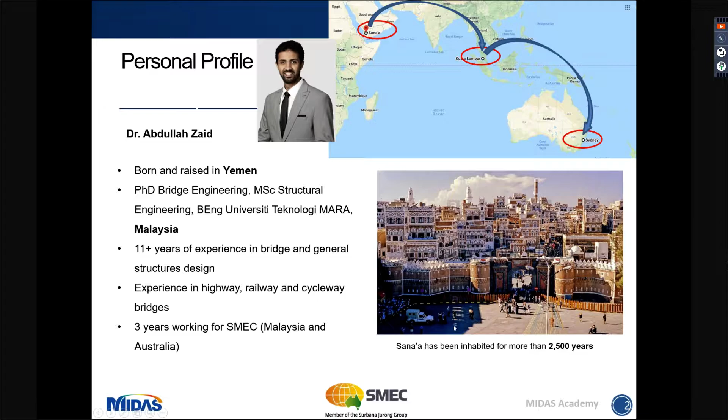I started with SMEC Malaysia for a couple of months, then I moved to Sydney. This is just a picture about my country, Yemen, and this is the capital city, Sana'a.

SMEC stands for Snowy Mountain Engineering Corporation. It's attributed mainly to the Snowy Mountain Hydroelectric Scheme project, which is one of the engineering wonders.

And this project has won various awards.

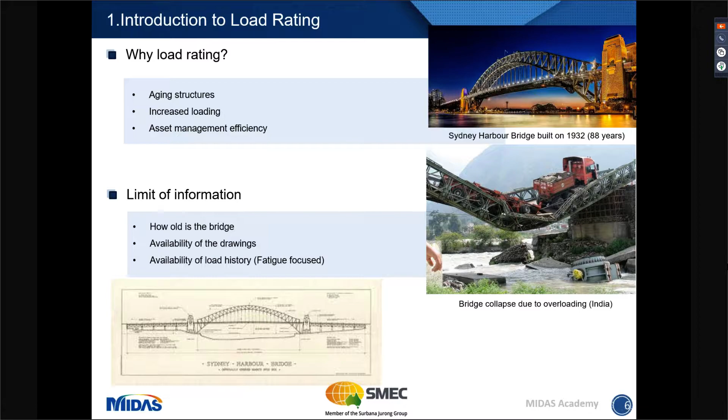Also, from the fatigue perspective, we need the loading history for the bridge, and we will get into details later.

Bridge assessment standards: every country or continent has different codes, but in Australia we have the overarching code AS5100, which is used nationwide. It has different parts, and Part 7 is especially for bridge assessment.

We also have state and client requirements. Each state in Australia has its own guidelines on how we undertake bridge assessment. In New South Wales, where Sydney is, we have for example the ASA, the Asset Standards Authority, which gives us guidelines on how we undertake the bridge assessment.

Other states like Victoria and Queensland have different guidelines and manuals.

In general, there are overarching steps for the bridge assessment, which is also given in AS5100, Part 7. But in general, we have levels of assessment, which is basically level 1, 2, and 3.

Level 1 is mainly to check the general serviceability of the structure and identify any emerging problems. Then we have level 2, which is a bit more comprehensive visual inspection, where we do a specific rate to rate the condition of each component of the bridge.

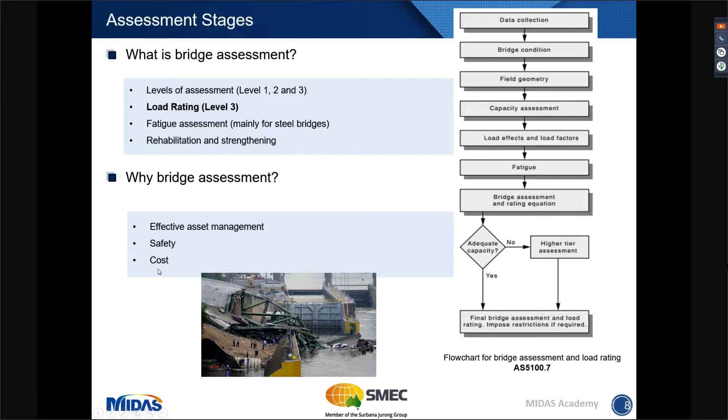Load rating - when we undertake the load rating, we have different steps as well. So we start with the as-new load rating. Basically, the as-new load rating is the design load of the bridge with regards to the as-built drawing. So this is assuming the bridge was just built, and based on the drawing, what is the capacity of this bridge?

Then we have to undertake the structure mapping and condition assessment. This is basically to identify any deficiency on the existing bridge, like section losses or cracks and spalling of concrete. And from the structure mapping perspective, if there are any new members or strengthening of the bridge, or maybe some additional structure to the bridge itself, we have to take that into account in our assessment as well.

Then after the as-new load rating, we have the as-is load rating. This is basically to illustrate how much capacity the bridge has lost during its lifetime. That could be due to corrosion or any other external impacts.

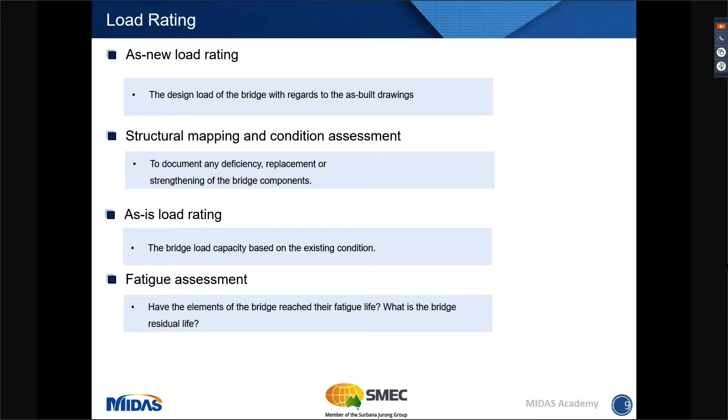The fatigue assessment or fatigue analysis has gained a bit of interest, mainly because there have been few bridge failures, especially steel bridges, and the reason is attributed to fatigue. That's why we have heard about bridges that lived for 50 and 80 years collapsing at the end. There are different reasons for that, and one of them is fatigue loading.

To give you an overview of fatigue: basically when we design a bridge to ultimate limit state, we see how much is the ultimate strength of the section, and we can load that section to its ultimate capacity. Nothing will happen. But if that stress or load has been repeated many times...

...100,000 times or millions of times, then as we see, the fatigue capacity will reduce with the increase of the load cycles. For instance, if we have a stress of sigma A1 in a structure or bridge, for that stress we can only load the bridge for N1 cycles. If N1 is 1,000,000 cycles, we can have that stress run 1,000,000 times. But if we expect the bridge to have more than 1,000,000 cycles, then we have to reduce the stress by increasing the section.

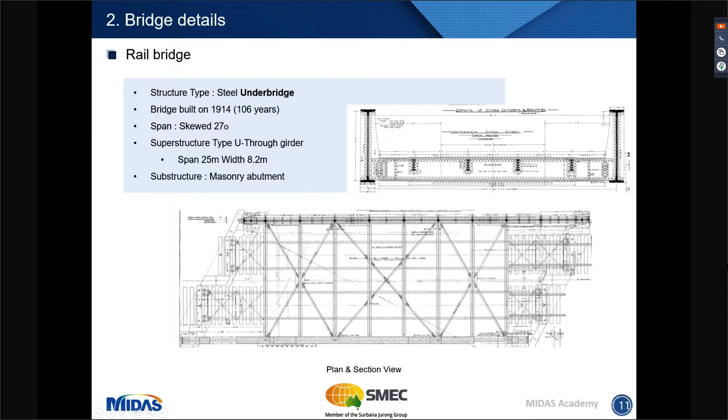The cross girder depth is 0.85 meters, and the stringers are between 355 to 500 millimeters - this is mainly the internal stringers. The end stringers are deeper because they are longer, as we've seen here - those stringers are longer. We have the transoms, as we can see from this picture, which are timber, and we have cross bracings, which are like equal angle structures, and then we have connections. Basically, that's what connects or rivets the cross girder to the main girder and the stringers to the cross girder.

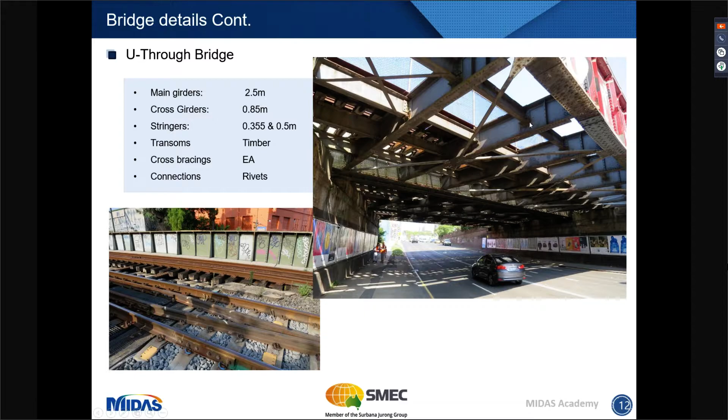So as I have explained, what are the parts that make up the bridge, or what are the components of the bridge itself. But there have been questions of what we need to model and whether we need to model everything. From engineering judgment, the engineer should have the ability to judge and model the things that affect the structure's behavior.

It's not in the interest of modeling everything, because with the advanced software we have, like MIDAS, we can model everything on the bridge - like cross bracing, the connections, the rivets, and everything. So the question is whether we need to go to that depth or not. I've illustrated that with 2 types of modeling: the grillage model and the FEM model.

The grillage is simple line models, but the FEM models are more into plates and 3-dimensional modeling of each component, such as the webs and the flanges with the stiffeners and the connection. This model was done by one of my colleagues in SMEC as well.

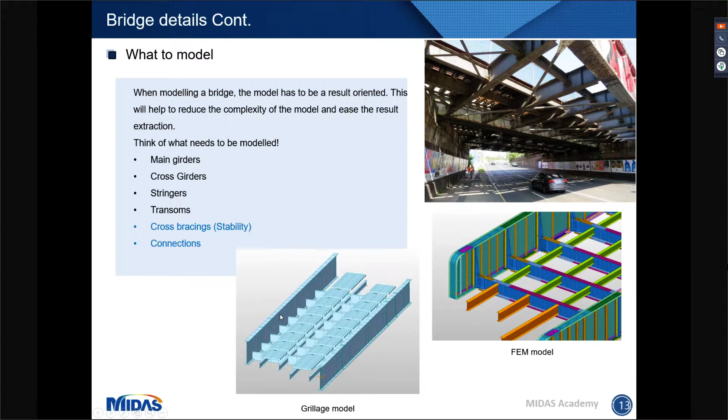Then for the bridge condition, we have undertaken a structural mapping. Basically, the structural mapping scope is to identify any old members being replaced, or any new members that have been used to strengthen the bridge.

And also a change for the section capacity, where we have losses on the top flange, bottom flange, or the web. We have to identify those and estimate how much is the capacity after the section losses.

So it's also important for us, after doing the condition assessment, to think whether the changes happening to the bridge mean we need to really remodel the bridge and use the new sections or the new members or not. This has to happen on a case-to-case basis.

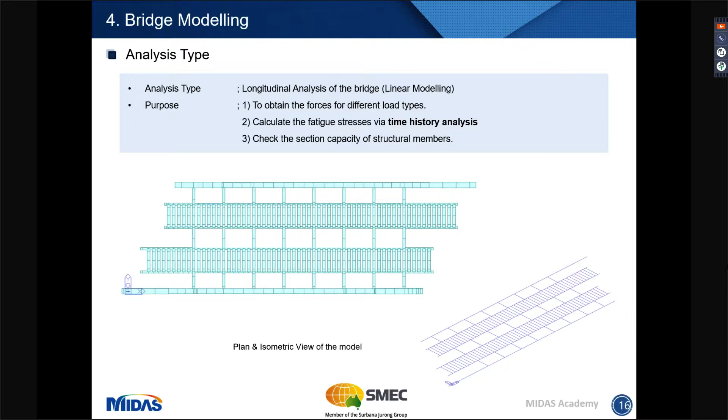So how we model the bridge: basically, we have created sections for all the components, which are the main girder, the cross girder, and we have the stringers.

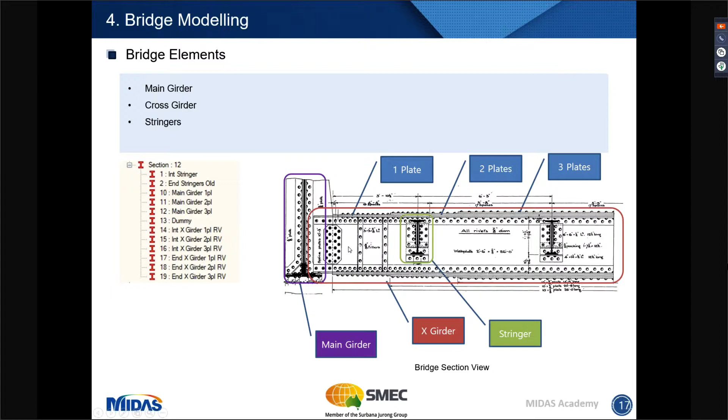So how do we define the section? The section has been defined with the coordinates, defined by coordinates, and that's where we could input all the coordinates for the top flange, the web, and the bottom flange, calculating the effective area, which is very useful.

There are different ways to model the bridge and the sections, which is an advantage with MIDAS. You can model things, whether it's in a CAD then transfer it, or you can build up your model, your sections, and model on MIDAS itself.

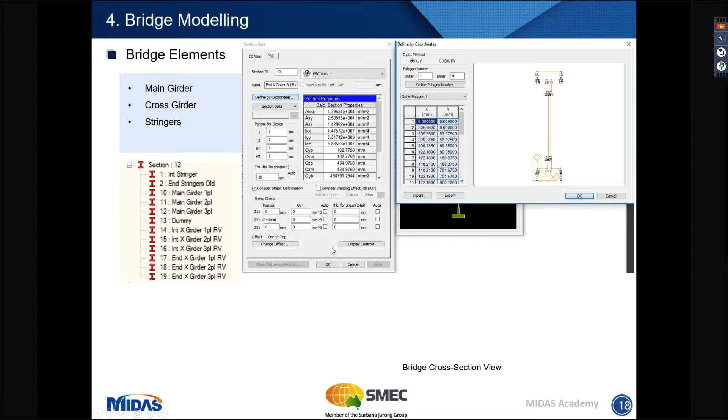So there is some release of the bending moment. It's also at the stringers as well. It's being considered as a pin connection while it's only through the web. The web is connected to the member.

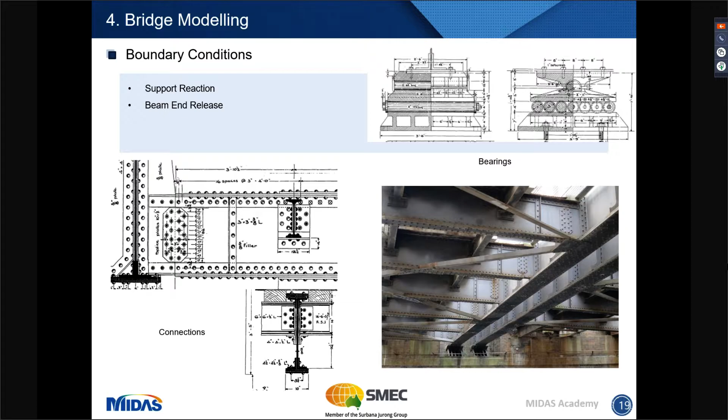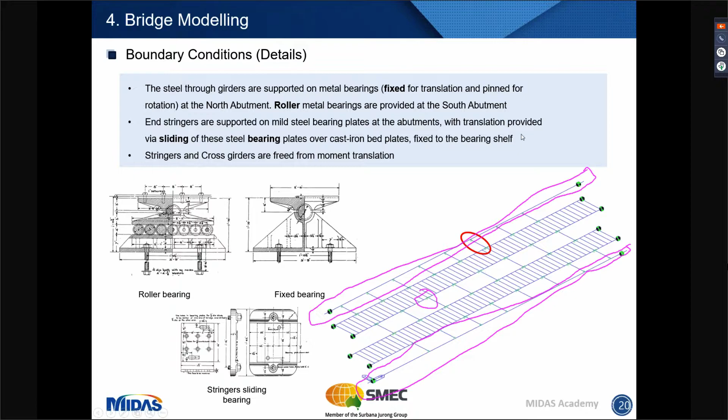Okay we need to get rid of... I'll just leave them. So what type of loadings have we used? So we have dead load, superimposed dead load, and we have the live loads, which is the moving loads we applied on the bridge, and then we have the wind load.

So for the live load, we have different types of moving loads, which is the 300 LA, is basically the train loads, or the heaviest train loads in the code. Then we have the Waratah electric, is basically the passenger trains, and we have some freight trains and other loads identified by the client.

For the fatigue assessment, we would need to undertake a specific loading arrangement. So we have to apply not idealized maximum loadings of the bridge, but rather the actual loading that has been traveling on the bridge itself. This has a specific load arrangement, and we will come to it in a second.

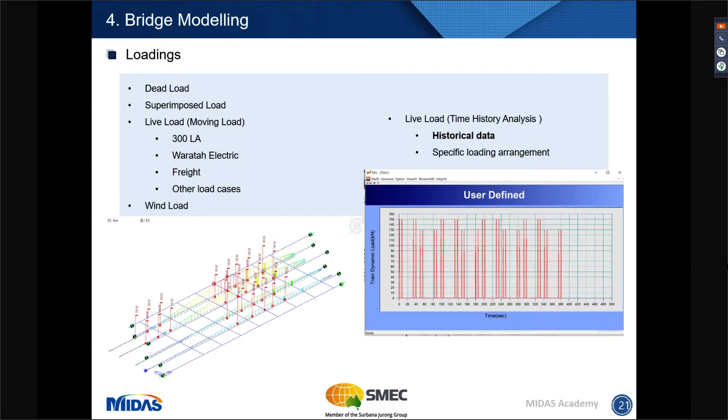So the types of live load, as we can see from the code, we have the 300 LA rail traffic, which is defined here, and we have the Waratah electric, which is also given, this is just a single car, and in this picture I'm showing the trains that we use in Sydney. They are double-story trains with what we call a Waratah electric.

And for the time, or for the fatigue assessment, we needed the historical data. So from the rail resource center, or from the historical data of the trains that traveled that bridge, we managed to identify 9 types of trains, and these trains have different arrangements. This arrangement is crucial for identifying the stress ranges and the number of cycles for the bridge. This is very important when we undertake the fatigue assessment.

And I will cover the fatigue assessment in a minute. So we have 9 types of loading, or specific loading, that has been traveling that bridge, and apart from the load rating for standard rail loading.

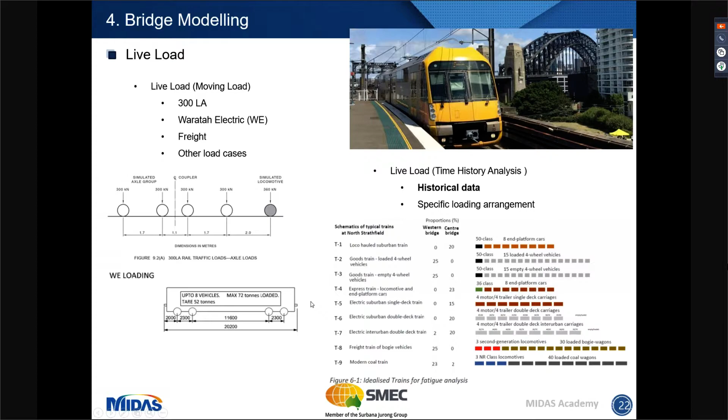The time history analysis, basically on MIDAS, when we run the moving load, MIDAS will run an influence line method, which will give us the maximum forces. This will give us the maximum moments, shear force, torsion for each member. And from the live load tracer, we can see which load has caused that maximum loading.

But the issue with the fatigue assessment, we are not looking at one single result or the maximum loading. Rather, we are looking at the fluctuation of stresses when a moving load is applied. This is where it becomes very important for us to undertake the time history analysis. MIDAS provides that. It was designed originally or mainly for seismic loading, but it's been useful also for tracking the historical loading from a moving load as well.

There is a specific training on how we use the time history analysis for moving load to identify the stress fluctuation on a single element as a moving load passes.

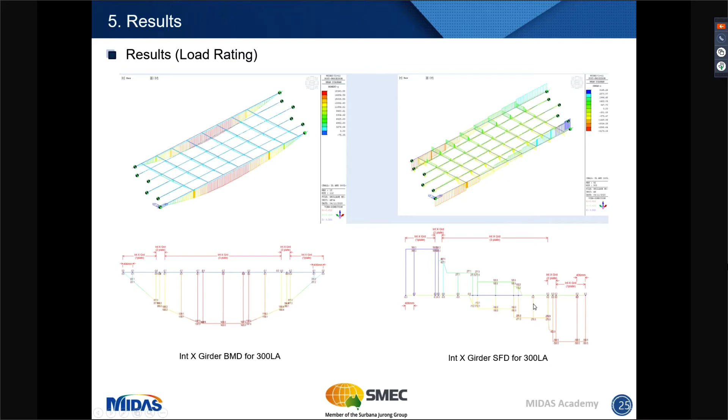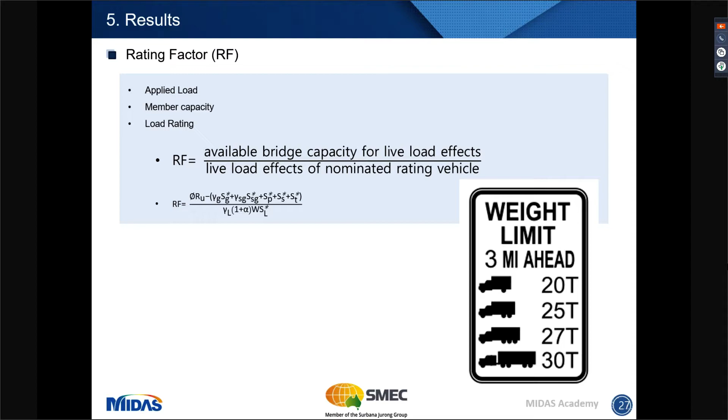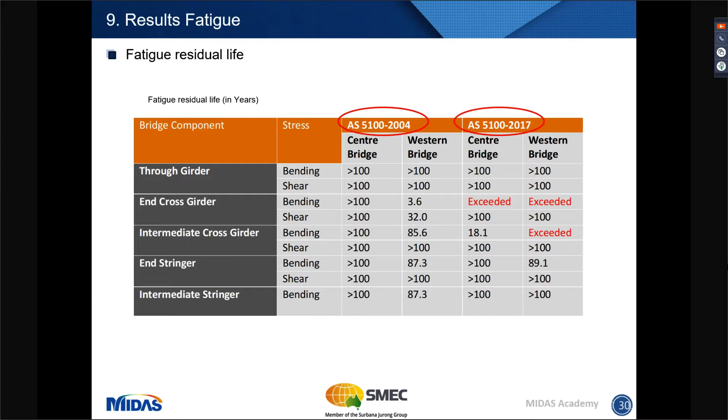As a conclusion for the bridge analysis itself, we found that the bridge required more detailed investigation because there were some deficiencies, not only in the Waratah Electric load case, but other load cases resulted in deficiencies as well. That's why we needed to undertake a more detailed assessment, and we went for nonlinear analysis of the bridge. Also for fatigue, the cross girders are critical, so they need more investigation, which is a fracture mechanics investigation for the cross girders.

So overall, to summarize our webinar: we started the bridge assessment with data collection, where we got all the drawings. Then we did the bridge condition assessment, after which we verified everything from the field - the field geometry - along with the condition assessment and structure mapping. After that, we went for the capacity assessment of the bridge with load rating and fatigue.

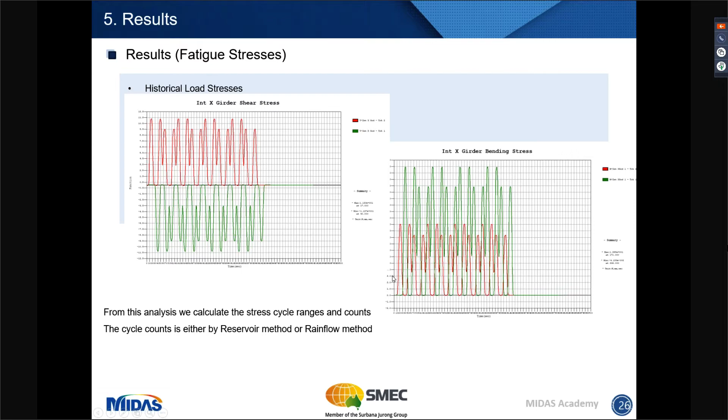One question from the audience: how do you determine the number of cycles in fatigue analysis? The number of cycles, as I explained, the cycle counts have to be undertaken by the reservoir method or rain flow method. For each moving load, we have different cycles, as we can see from the bending moment graph. The reservoir method will tell us, based on train 2, which is the orange graph, we have 6 cycles of 45 MPa. We also have to calculate those small cycles, and that has to be done for each loading and each train. Then the authority tells us how many times this train passed on that bridge in its lifetime - if it is, for example, 100,000 passes, we multiply the total number of cycles by the number of passes to get the total.

Thank you for the answer. Next question: how do you check connection details like rivets and bolts in assessment? The code gives us guidance on how to calculate connection capacity. We have different methods - we can carry out a special analysis, or use a simplified method where we just take the web connection for shear and the top and bottom flange for bending. But if that doesn't work, we have to analyze the group of bolts, using vector analysis of the group, which tells us how much force each rivet or bolt is taking.

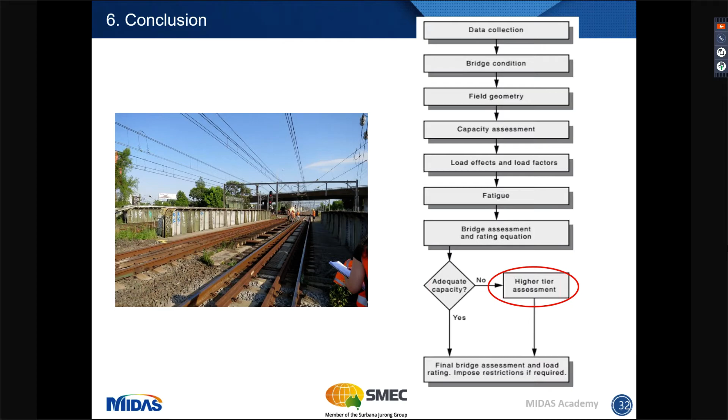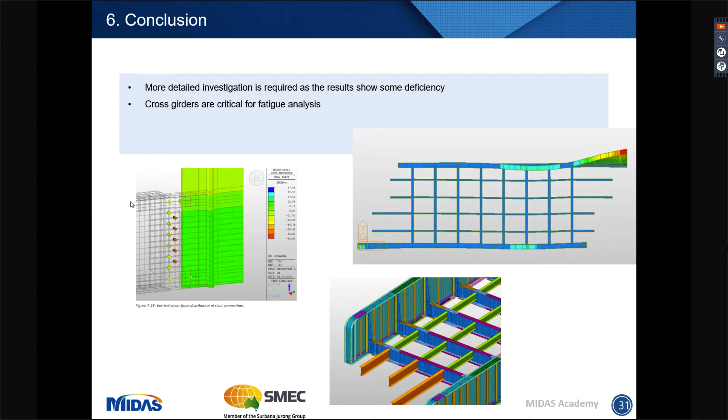Can you also highlight specific differences between the 2004 and 2017 versions of the AS code? For the fatigue assessment, the graphs have been changed, the formulas also have been changed. I think it's beyond the seminar, because I haven't created the comparison here. But what I can recall, there is a change on the formula type and the factors within the formula itself, and also, as I've shown in the previous graph, let me go back to that graph. The cutoff limits from the previous codes have been removed in the new code.

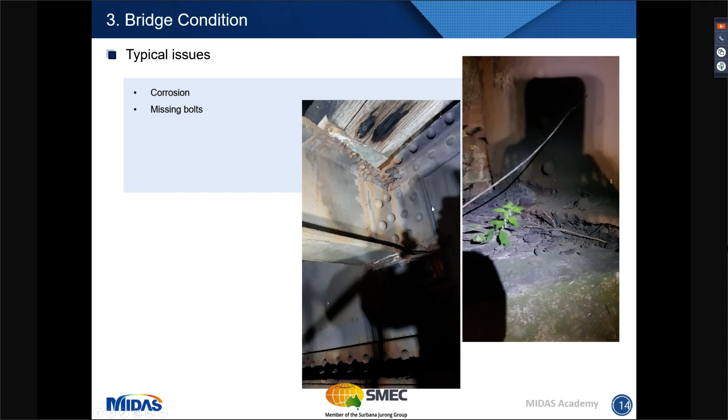Next question: can you please speak about whether the constant or variable amplitude method should be used? I think that will be explained in the upcoming seminar, and I think this is for the time history analysis. The upcoming seminar will give more in-depth coverage of that analysis as well for the time history.

I actually didn't understand about the amplitude method. I think if I'm not mistaken, the constant or variable amplitude comes from the time history analysis we have. I don't know whether I understood that question or not. I'm not sure either. Anyway, let's go ahead with the next question.

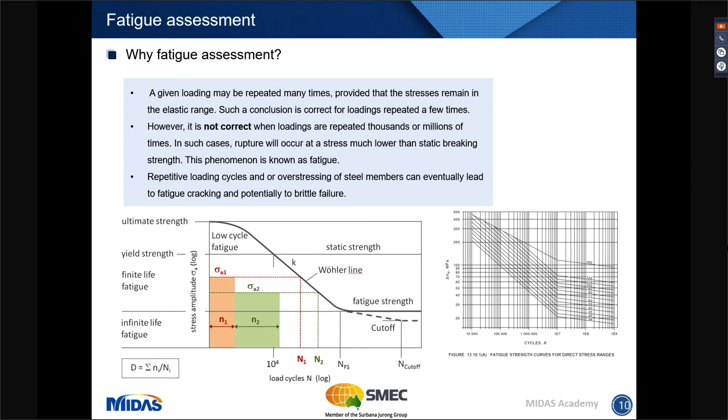I think on one of the graphs I highlighted whether corrosion will influence the redistribution of stress and stiffness of the bridge itself, then we need to remodel it. But if not, it just affects the capacity calculation, and that's where we've shown it. For this bridge, we just considered it from the capacity perspective only.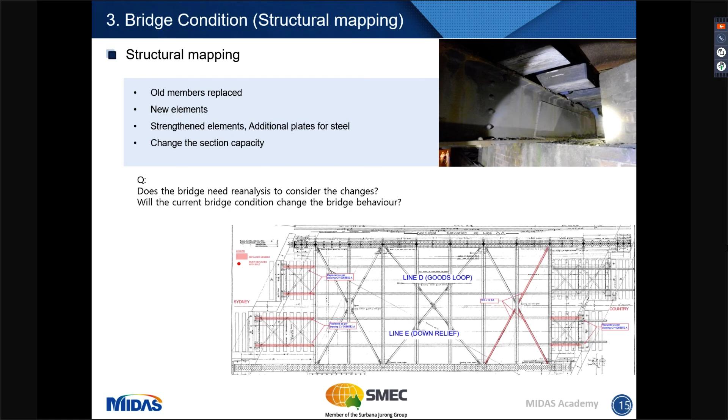Okay, and the rivet model is using rigid link? He means the FEM model. I think in your model as well - what kind of link element did you use for rivet? No, we've just modeled it. The elements have some member releases at the ends, and from those releases, we extracted the force and did the connection check in a spreadsheet.

Has fatigue verification been undertaken? At site, fatigue verification is not yet done, only a theoretical calculation.

And is there an assessment also for the masonry bearing support in MIDAS? The bearings, you mean the masonry supports? I don't think we've done any load rating for the masonry inspection because it's not as straightforward. The codes don't really cover how we model and analyze masonry structures. I know there are some softwares for masonry arches, but not for piers and abutments. I'm not sure about the masonry bearing supports.